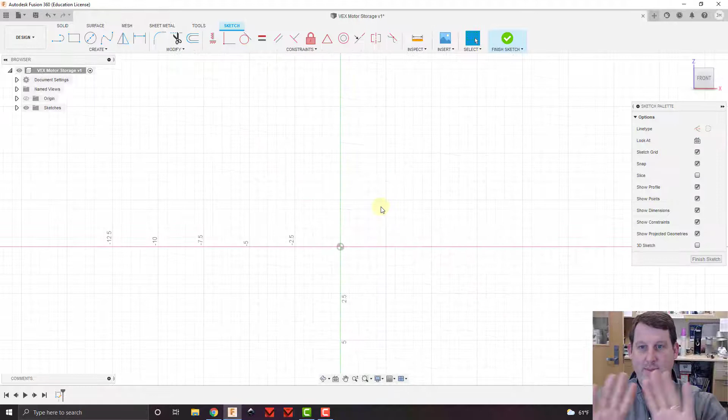So let's get started. We're going to click here and click on the front face because we're going to create the back first, so we want to be looking straight on at it. Before I do anything else, I'm going to create some parameters, so I'll do Modify and Change Parameters.

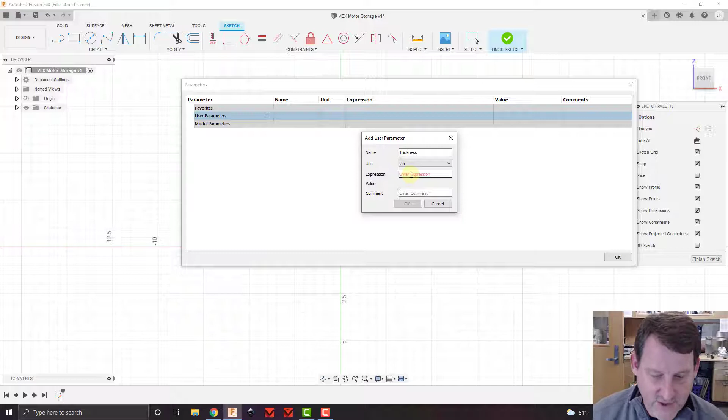I'm going to add a new user parameter called thickness. This is where you figure out how thick the plywood is you're using. My advice is to grab 3, 4, or 5 pieces of plywood, lay them flat on top of each other, squeeze them together with a hand clamp, and use a caliper to measure how thick those pieces are.

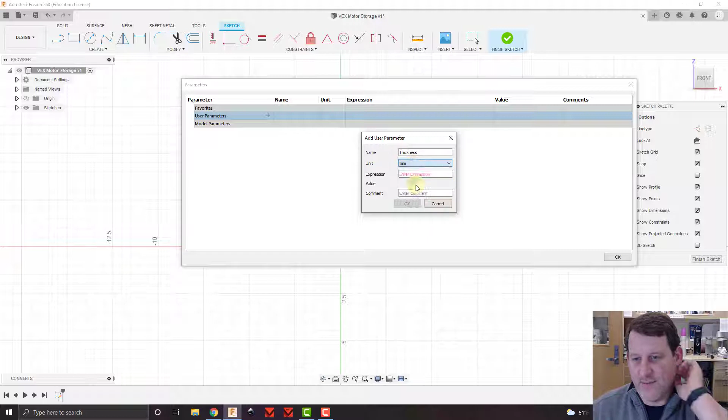Divide that number by the number of pieces to find the thickness of one piece, and put that number in here. Remember, the number on your caliper is in millimeters, so if you use that number, change the units to millimeters, or convert it to centimeters. I'm leaving mine in millimeters, since I already measured mine at 2.7 millimeters thick.

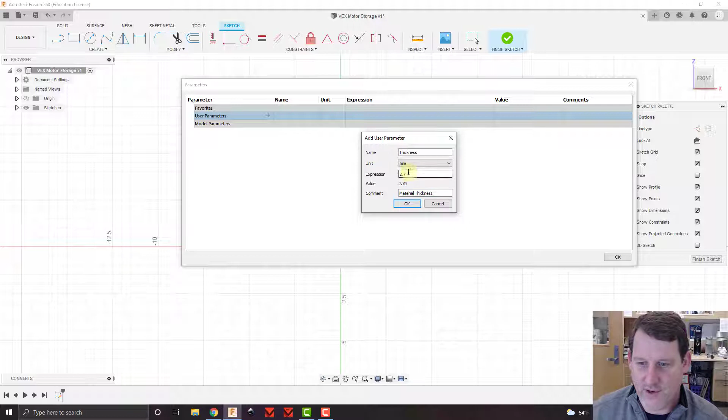Then for the comment, I'll put material thickness. No matter what you're doing, you need to actually measure the plywood you have on hand, because a lot of times it's off by enough that it won't fit together. So don't just use 2.7, go measure it yourself, no matter who you are. Everyone should have their own number here. If you need help figuring out how to measure it, just ask me and I'll help you.

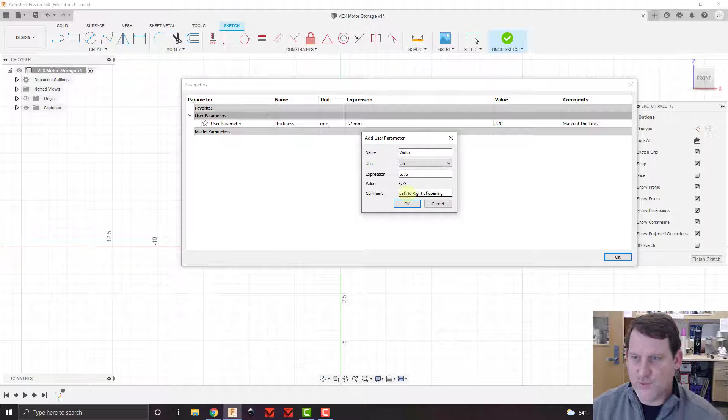Click OK. Now my next user parameter is the width of the opening, so I'll call this one width. Mine is 5.75 centimeters, so make sure it says centimeters. I'll set the comment as left to right of opening, to be really specific about what width means to me, which is left to right.

Now I'm going to make another one called height. Mine is 3.25 centimeters, and if you're making motors, these numbers should be the same as mine. For the comment, this is top to bottom of opening. That's a terrible spelling of bottom, B-O-T-T-O-M, not two M's. Okay.

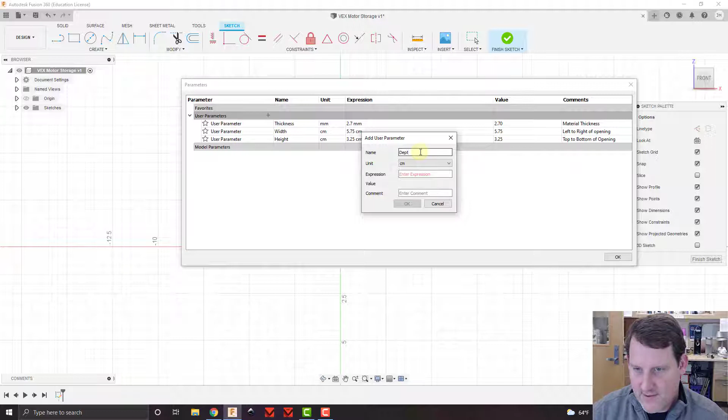One more parameter I need: the depth of the opening. I'll call this one depth, and mine is going to be 3.5, and the comment is front to back of opening. I'm being really specific here, describing exactly what it is.

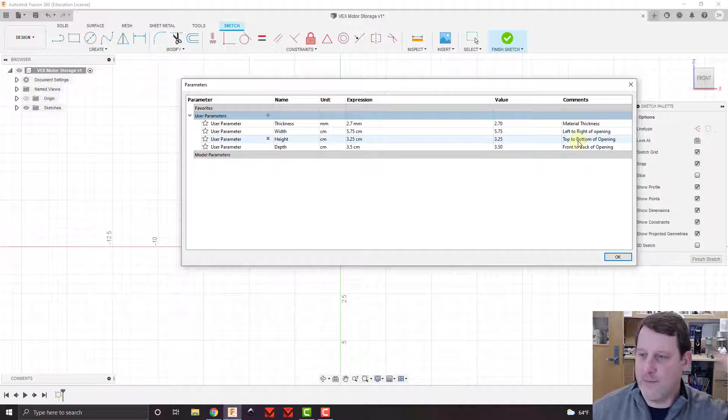That way, if I go to open this project up in a week or two, I can just look and see, oh, that's what I meant by height was top to bottom of the opening. Okay, that makes sense. Click OK.

All right, so we've set up our parameters. Now we just need to model. It's going to be easier. If you're making your own custom display case, your widths and heights will obviously be different, but you can still model along with us, you'll see why. I'm going to click here on the rectangle tool.

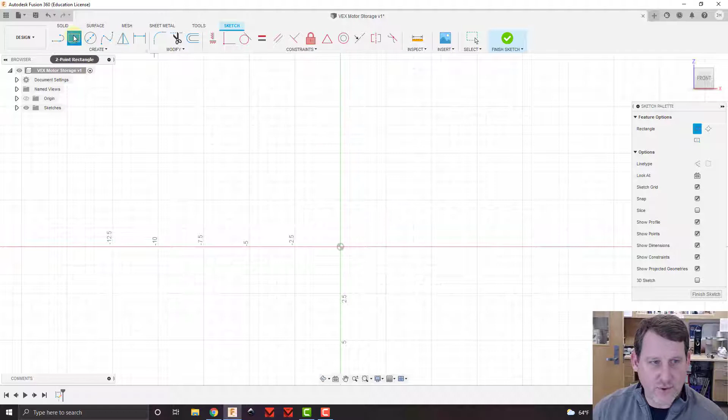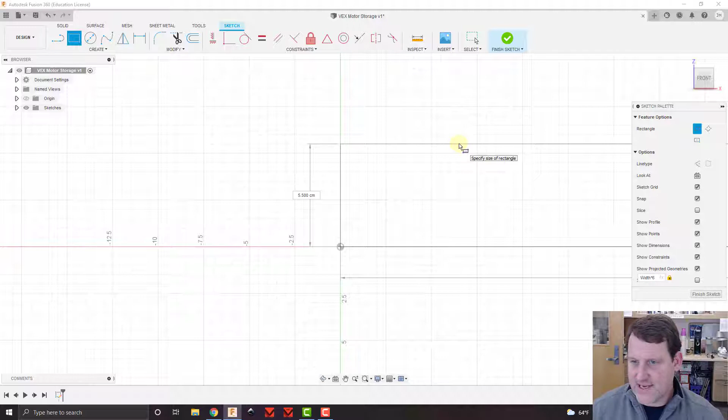Because I've already created my sketch, I'm going to start making a rectangle. The bottom for me is going to be 6 widths wide plus 7 pieces of plywood. So here I'm going to do width, enter, times 6. The asterisk is times. So it just made it a lot wider.

And then I'm going to do plus, I need to include those 7 pieces of plywood, one for each one and then one at the end. So plus thickness times 7. That'll give me the entire width of the back.

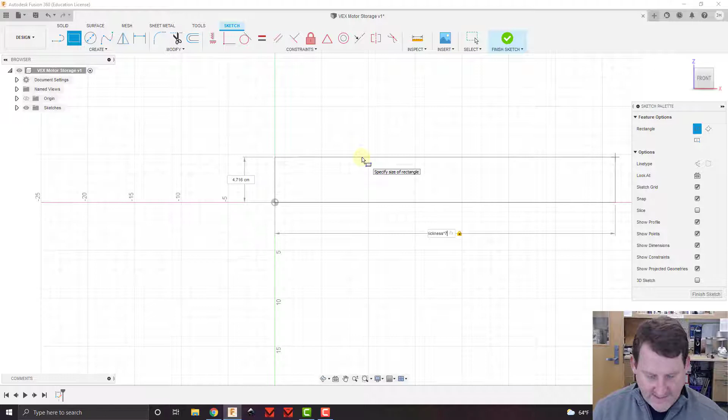And now I'm going to click tab to get to the height. I gotta do the height now. If you accidentally push too many enters, well, let me show you what that looks like. If I was back down here and I pushed enter too many times and it drew my square for me, I didn't set this side yet, which is totally fine.

Here's all you do: hit dimension, click on it, and then go out to the side and click again to place it. And now we're going to do the height. If you hit tab while you were in there, you would have been able to do both before you set the rectangle. It doesn't matter either way.

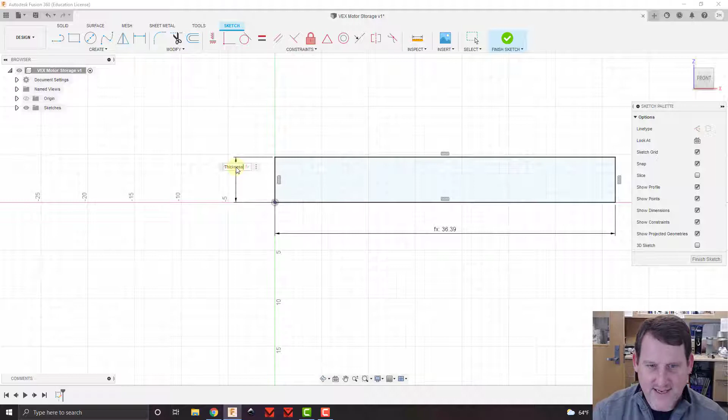So on this one, the height is going to be 6 heights of my openings. So it's going to be height, enter. Okay, that was right. Height times 6, plus I still need 7 pieces of plywood up here as well. So thickness, enter, times 7, enter, that's my height. So that is going to be the width of my back.

Now I want my back to poke out the sides. I have all these little tabs to hold it into the sides and make everything nice and rigid and great. So I'm going to cut those tabs in right now.

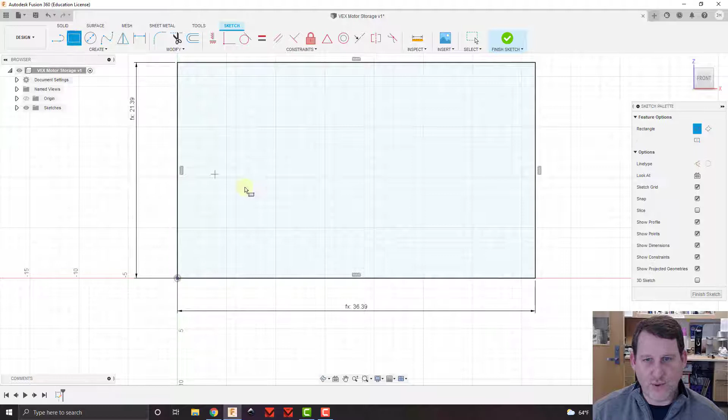So I'm going to grab a rectangle tool and go here on the side and just draw a little rectangle. Anywhere on the side, doesn't really matter. I'm going to call this, I think, 2 centimeters.

Tab, and I'm going to call this thickness. So you can make yours whatever you want here. For this length of a side, 2 centimeters sounds like a good amount to me, but you can play around with that number some. Now I need to center this rectangle on this line here.

So I'm going to grab the midpoint tool, which is this little triangle up here in the constraints, and I'm going to click on... see how it's hard to get the right one? I want the small one. So when that happens, I'm going to click and hold. In about 2 seconds, it'll pop up with all the options. I can choose that one or that one.

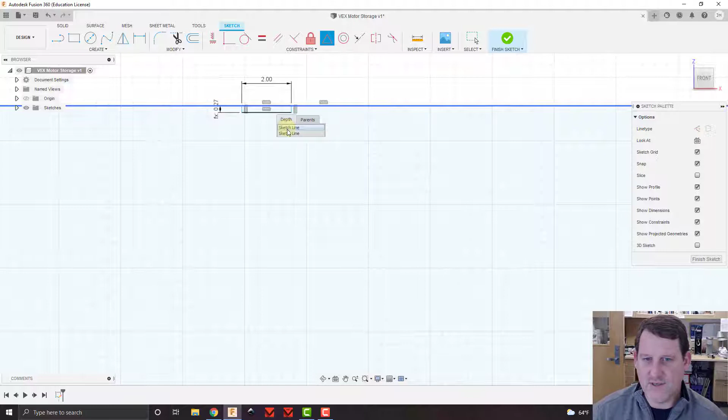And I want the little one, and I want to click on the big one as well. So that put those 2 midpoints together. Now that's right in the middle of it. So now I'm going to do create.

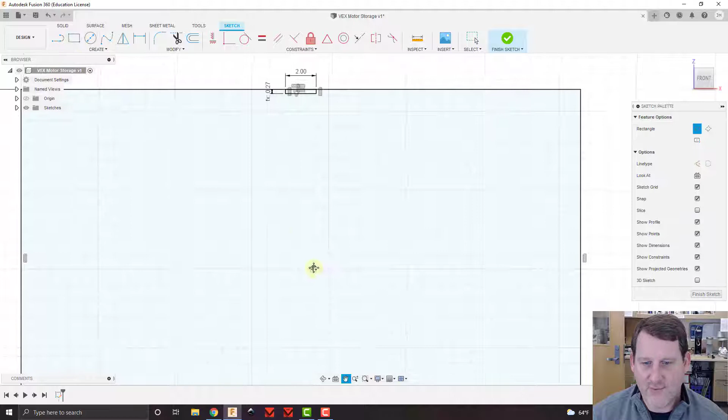I'm going to do a rectangular pattern. Actually, before I do that, did I want to do it that way? Yeah, that works fine. I'm going to actually create another rectangle down here before I pattern it, because then I can pattern them at the same time.

So here I'm going to do that same 2 centimeters wide and then thickness in this direction. Enter. Grab my midpoint tool. I'm going to line up the midpoint of the little one with the midpoint of the big one. And now I'm going to do the create rectangular pattern. And by doing it this way, let me close this door.

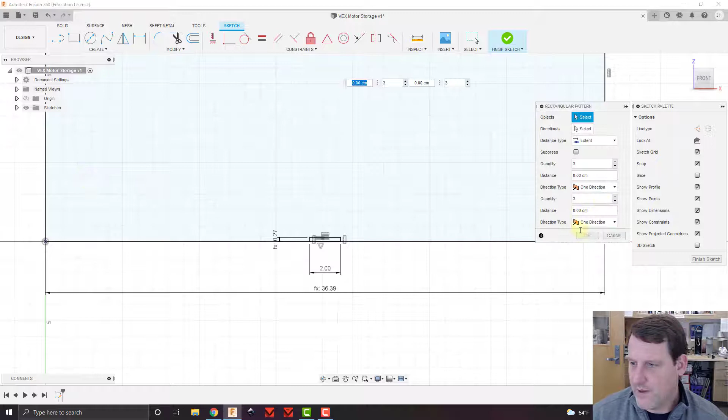By doing it this way, I can actually create the rectangle pattern for both at the same time, so it's a little bit faster. There, and there - those 3 things I need. I'm going to come up here and choose these 3 as well.

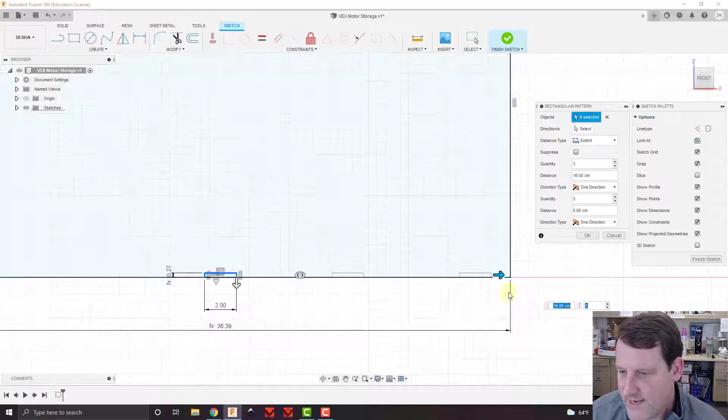1, 2, and 3, and then I'm going to set my rectangular pattern. I'm going to just drag it out, getting it to where it's barely off the edge here. It doesn't matter how much off the edge - maybe I can get it... nope, it's a little off the edge. So that's perfect.

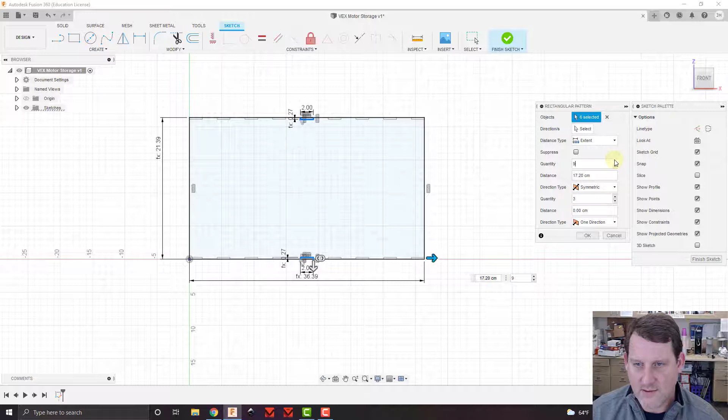And now I'm going to set up - I don't want it, I'm dealing with these 3 up top. So I want it to be symmetric in both directions, and I'm going to need way more of them. Maybe I'll go up to like 9. 9 works well - you can't use an even number.

Watch what happens with an even number - it puts more of them on one side than the other because we started from the middle out. So make sure you're always using an odd number when you're starting middle out like this. I'm happy with that - that's a great amount. So I'm going to say okay.

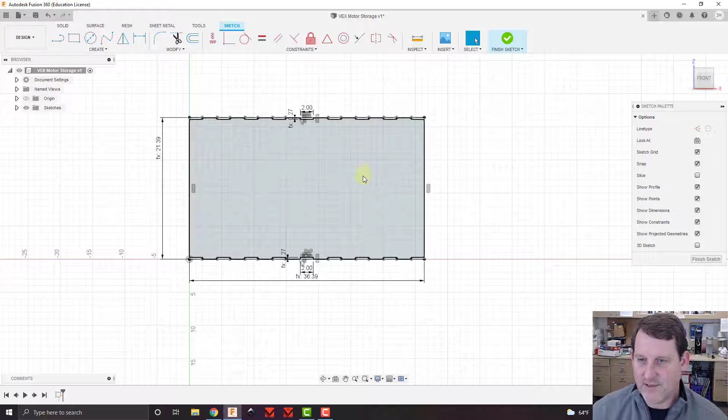Now you can see I've got, when I go to extrude this middle, I've already cut in the tabs. So that's what my middle piece is going to look like. I'm going to repeat the same thing, but now from this side and that side.

I'm going to grab a rectangle, draw it in anywhere on this side. It's going to be thickness in that dimension - whoops, thickness in that dimension - and then tab to get to the other side, and it's going to be 2 again there. I think that looked good.

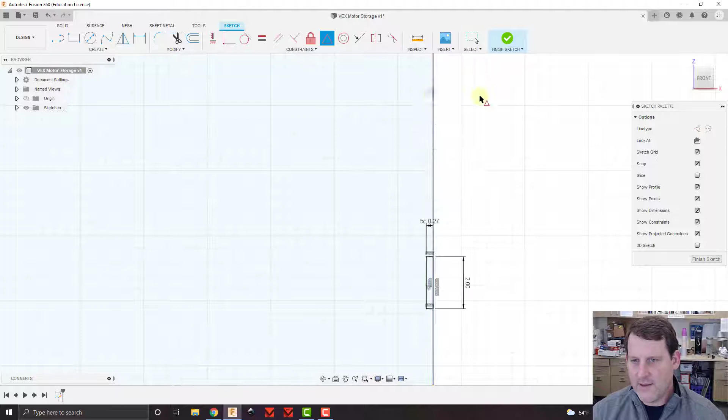Now I'm going to get my midpoint tool, grab on this little one and the big one - they just got centered. And now I'll repeat the same thing on this side.

I'm going to grab, make a rectangle - that side is thickness, that one is 2. And then I'm going to use my midpoint tool to go here. Oops, I didn't grab it, so I'm going to click it again to unclick it. Now I don't have anything selected.

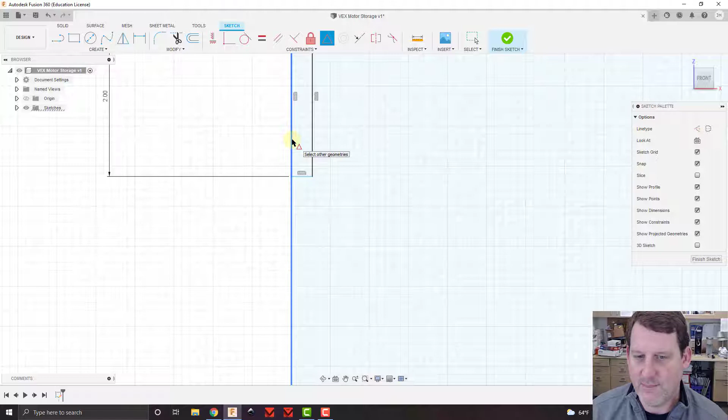I'm going to try and grab the little one up here. I can't, so I'm going to hold down the left button until this little menu pops up, and now I can choose it. I always like to choose the little one first because it's easier to see that you've got it - if you already have the big one chosen, it's hard to see the little one get bright. Now I'm going to click on the big one, and that should center it.

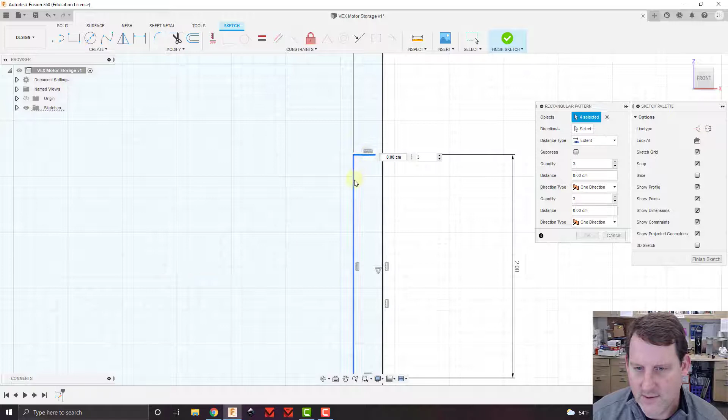Okay, so now I want to add in the rectangular pattern tool - create a rectangular pattern. I need to zoom in here so I can choose my 3 things - 1, 2, and 3 sides. Zoom out, go over to the other side, zoom in, 1, 2, 3. So I should have 6 things selected, which I do.

Now I'm going to find my arrows, which should be halfway between... oh nope, they're right over here. I'm going to drag my arrow up, zooming in wherever I'm dragging to see what's going on. I'm going to go just over, and I'm just over just like that. Perfect.

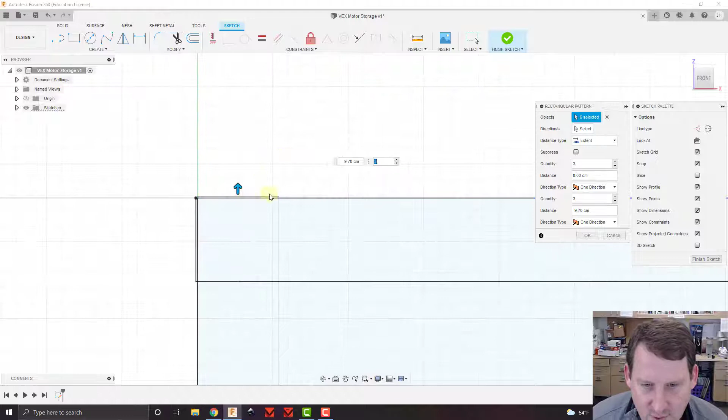Now I'm going to switch this one - I'm working on this bottom one because I see that this number has changed down here. I'm going to switch it to symmetric, and increase the number of this bottom one. Keep going - remember, you got to do an odd number. That feels like a pretty decent amount.

I think the 2.0 was too much, so I'm going to leave it there. What I'm going to do is shrink this 2.0 a little bit because I don't like how small these are compared to this. But if I go to 5, then I feel like this is too big compared to that - so it's somewhere in between. I'm going to go back up to 7.

I'm going to click OK, and then change this 2.0 to 1.75. Enter - that looks a lot better. And this 2.0 to 1.75. Enter - you don't have to do that, I'm just making it look good in my mind.

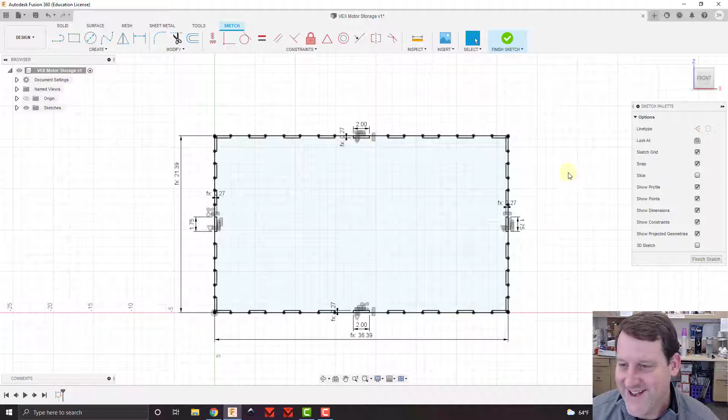All right, so now I want to do extrude, and I'm going to extrude this middle chunk, 1 thickness for a piece of plywood. I'm going to tip it just to make sure it's going right - yep, that's perfect, it's creating a new body. I'm going to say OK.

Now I've got the back fully modeled. It's ready to rock and roll. So that's a lot of work done.

The next thing we're going to do is make this right-hand side of the display case. Then we're going to copy that right-hand side and put it over on this other side. Then we're going to create middle dividers to go all the way through, and do the same thing working from the top down.

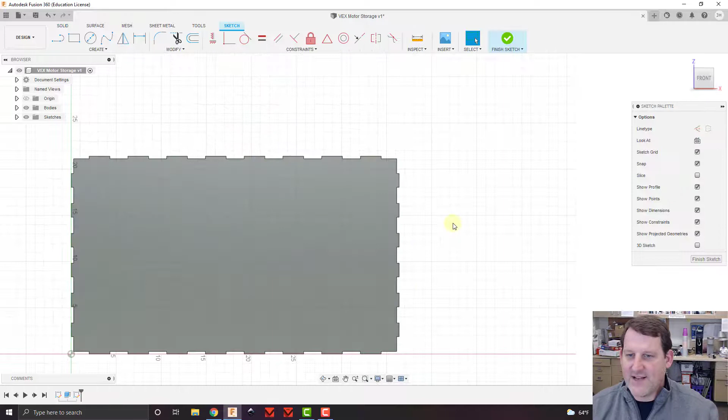So to do this, I think the easiest way is to be kind of weird. You might think of flipping it on its side and modeling out the whole side going down. But what's actually going to be easier is if we sketch on the face, sketch the narrow edge of the piece of plywood, and then extrude it forward and backward to cover stuff. It's kind of a weird way to do things.

So to do this, what I want to do is draw a rectangle from across here, from this top corner, all the way down to this bottom inside corner. So I need to find locations for those two things.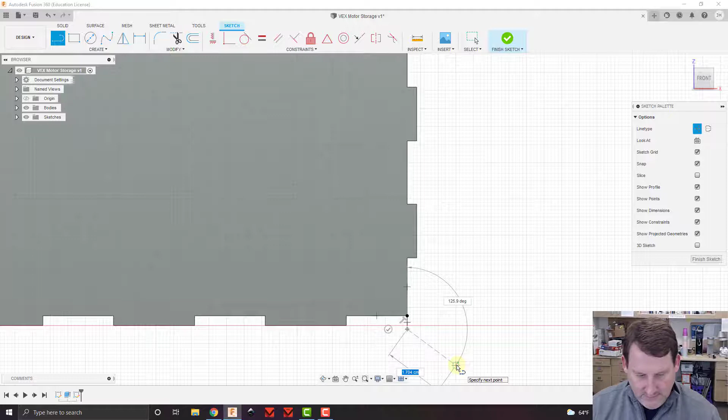I'm going to grab my line tool and make it a construction line. I'll click here and drag straight down to draw a line. That's going to be my inside edge. Now I need to find out where this crosses the red line, so I'll grab another line tool and drag from here over. That's going to be the inside corner.

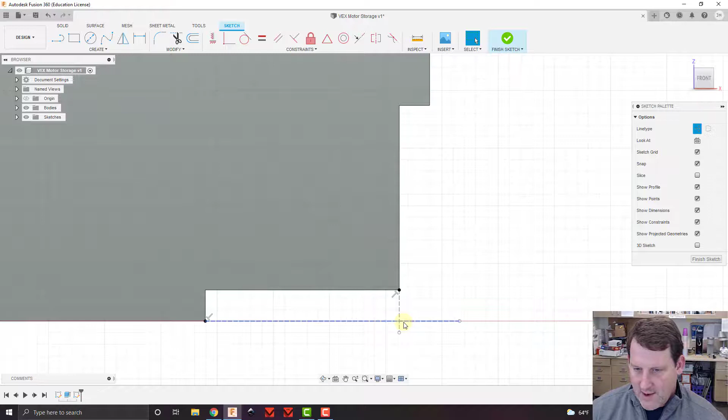I'm using construction lines because I don't want them to be part of my drawing. I just want them to line stuff up for me. So life is a little easier if I do that.

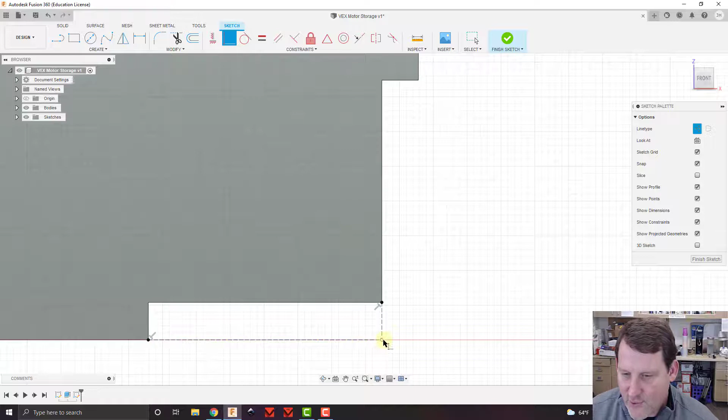I can even do a few more things. I can use a coincident tool, which means line the two things up. So I click on this outside point and this line, and it lines that outside point up with this line. I click on this outside point and this line, and now the corner of this little box is right where I want to be. That'd be one way to do it.

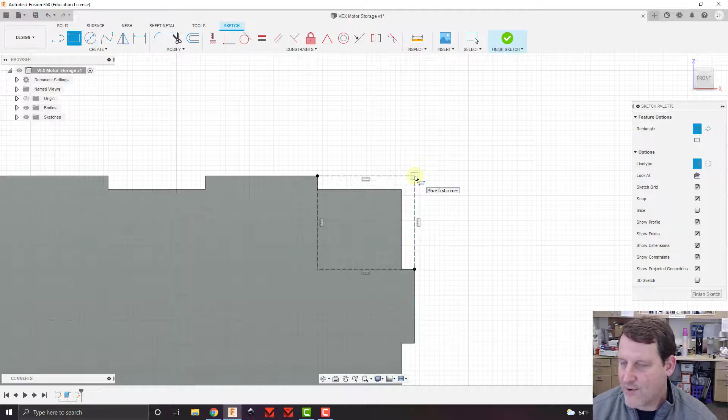Now up here, I'll show you a different technique for construction lines. You don't have to just do lines, you can do whatever shape you want. I'm going to grab a rectangle, and I want my line to line up with this outside face and with this outside face. So I'll draw a construction line rectangle from here to here, and click here. In one swoop, I have this outside corner identified. Because I use dashed lines, I don't have to worry about it chopping my drawing up.

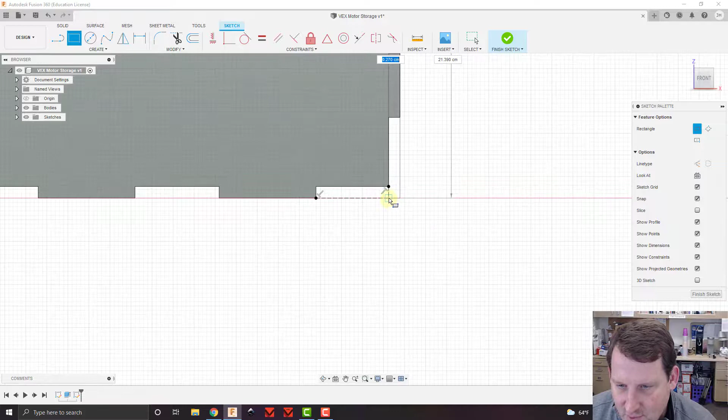Now I'm ready to do an actual rectangle. I'm going to turn my construction lines off because I want to actually draw the rectangle now. I'll start here and drag down all the way to this inside corner, and then click. Right there, it just drew the edge of the side piece.

So now I'm ready to extrude. The only drawback of doing it this way is I've got to click on all these individual rectangles, because every tab was broken into a rectangle. There we go. I'm going to go back out to my home view, and then I'm going to extrude.

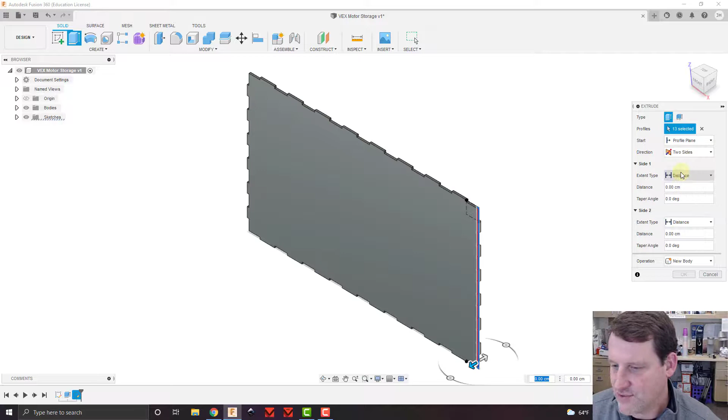This time I want to do a two-sided extrusion. I'm going to grab this blue one to see which one it is, and it's this one right here. This is the one where I want to do depth, so I'll type in depth here and that'll capture the correct depth. On the other side, we're doing the same thing, but we want this one to go the other direction, two thicknesses.

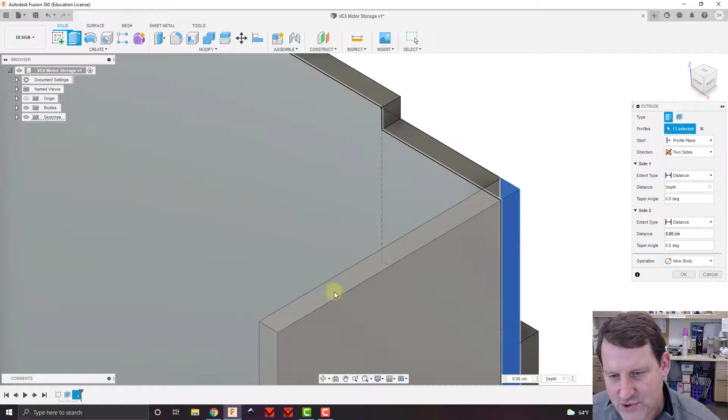So one thickness just to get it through. I'll show you what the one thickness will do. It's kind of hard to see, but this right here is the front extrusion out this way. We want to get one thickness to get through this, and then another thickness to bring us to the back side. I'm on the right here, let me see if I can see it better.

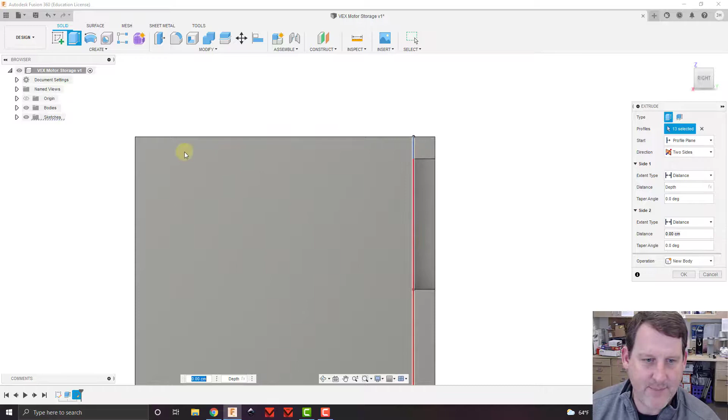No, right here, there we go. So we just extruded out the depth of the opening. Now we need to extrude backwards the thickness of a piece of plywood, plus an extra thickness. That'll put the tabs of the back into the side and make it stronger. You'll see what I mean in a little while, but going back to home now.

So on this direction, we need to go here and do thickness, enter, thickness, enter, and then times 2 thicknesses. Now it thinks that we want to cut, and we don't want to cut, we want to create a new body. Make sure you switch that.

If you accidentally click OK, so let's say we had it on cut and I said OK, I'm like, oh no, it just cut that off.

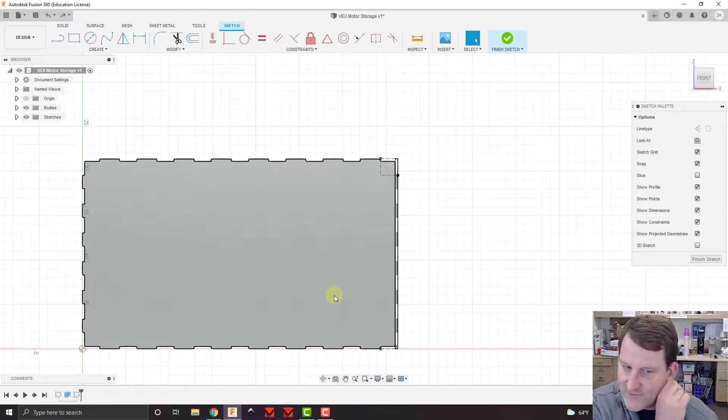I could do two things. I could Control Z, which would undo what I did and have to go back and redo it all. Or from this point, I can just go and right click on the extrusion and say Edit Feature. And I could say, now I can make a change. Oh, I want to do this as a new body instead of a cut. And now I can click OK, and now I have the side modeled in.

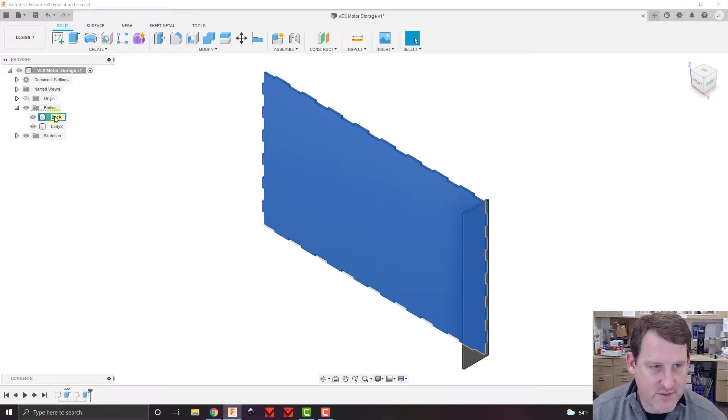Awesome, so that's the side piece done. We need to make the other side piece on the other side. So I'm going to go over here to bodies real quick. Let's start naming our bodies because we're going to get a bunch of them in a second. So let's name this one the back, and then this one is the R side, the right side.

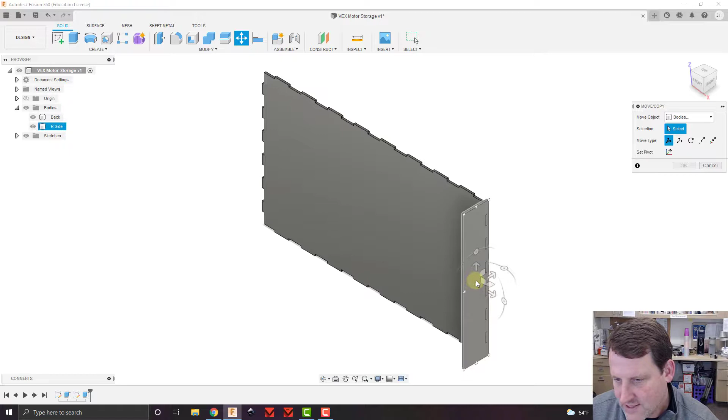Now we're going to copy and move this across to the other side. To do that in Fusion, you're going to use the M button for the Move Copy command. You're going to make sure this says Bodies at the top. And then you're going to click in the middle of the body somewhere. You don't want to be on one of these dots. You want to be right here in the middle.

And then you are going to drag it using this arrow, right? So I want to drag it straight back across this way to close to the edge, but not quite there yet. See, I have a little bit left to go. And I'm going to say OK.

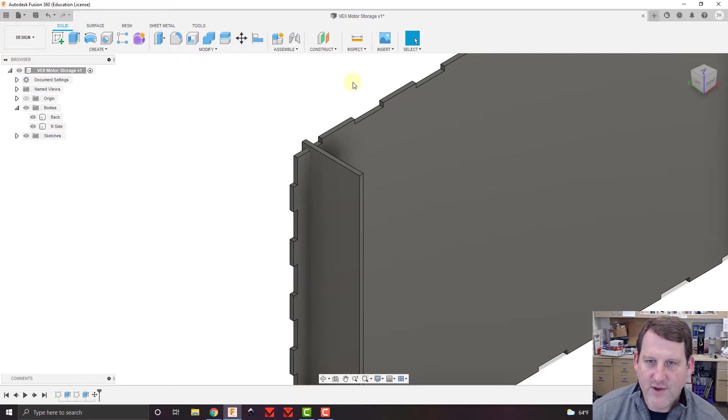I'm going to grab my cube from this top corner and rotate it around this way. Now I'm going to use the Align button to bring it into perfect alignment. So I'm going to click Align.

You want to do the thing you're going to move first. So I want to move the side, and that's the first thing, the from, and then the to is where I want to align it to. And I want to click in the middle of this gray, not on one of these dots, but in the middle of this gray, and that will line up those two faces. And now I can say OK.

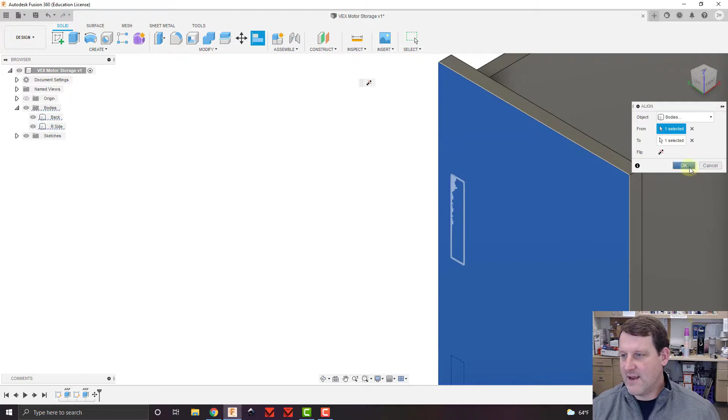So now I can see, go back to my home view. Oh, I didn't do copy. OK, so I'm going to Control Z. I didn't do create a copy. I'm going to do that, put it back to where it was, and I'll show you what I did wrong.

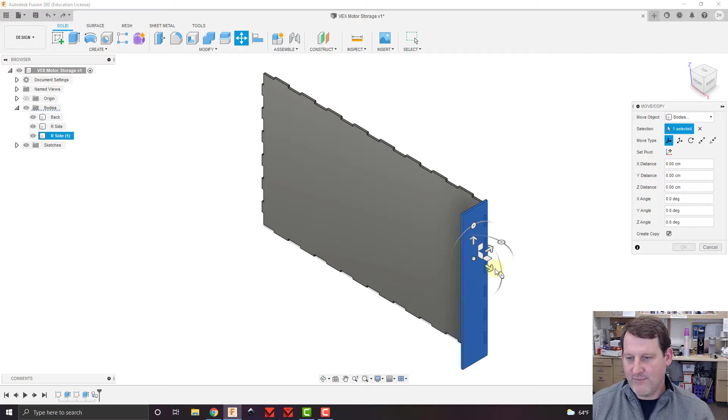M command, I'm going to click in the middle of this one. I need to create a copy. Otherwise, I'm just moving it instead of copying it and moving it. So now when I move it, you see I've made a copy of it. I'm going to click OK.

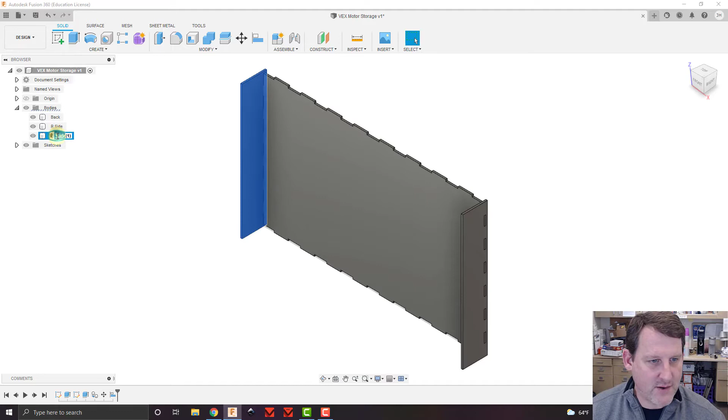Back to this top corner. I'm making lots of mistakes today. Zoom in here. I'm going to align the face of this one with the face of that one, and then click OK. And now I go back to home, and I see that I've got a left and right hand side. I'm going to change this one from R side 1 to L side because it's the left side. Awesome, so now everything looks great.

I think we are ready to rock and roll. So that's it for this video. In the next video, I'll show you how to make all the intermediate vertical ones. And then we'll start with the top, work down through the middle, and go to the bottom, and then we'll be done modeling. Fantastic job, everybody. Hang in there.